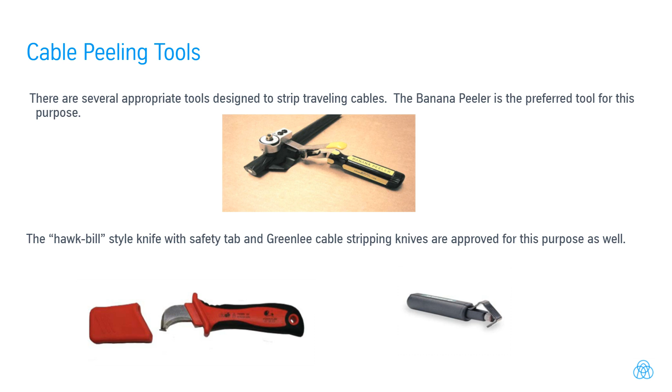Tag the tool "Danger. Do not use." Contact your supervisor for a replacement. There are several appropriate tools designed to strip traveling cables. The banana peeler is the preferred tool for this purpose. The hawkbill style knife with safety tab and Greenlee cable stripping knives are approved for this purpose as well.

5 basic safety rules that can prevent all hazards involved in the use of power tools. Keep all tools in good condition with regular maintenance. Use the right tool for the job. Examine each tool for damage before use. Operate according to the manufacturer's instructions. Provide and use the proper personal protective equipment.

Employees and supervisors have a responsibility to work together to establish safe working procedures. Employees must be trained on how to use all tools needed for the job. Employees shall not use unsafe hand tools. Tools must be used for their intended use only. Remember, if you encounter a hazardous situation, stop. Contact your supervisor or the safety department immediately.

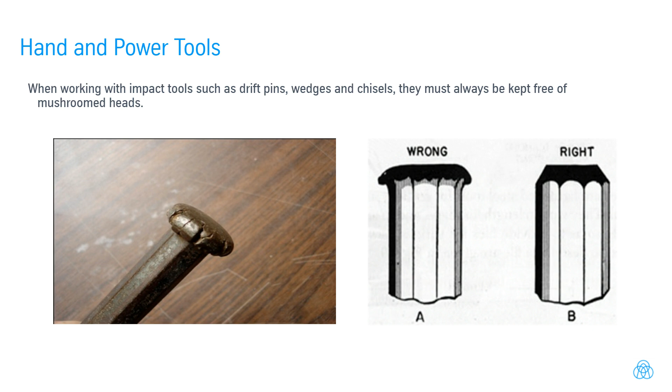Wrenches, to include adjustable, pipe and socket wrenches, shall not be used when the jaws are sprung to the point slippage occurs. When working with impact tools such as drift pins, wedges and chisels, they must always be kept free of mushroomed heads. Wooden handles of tools shall be kept free of splinters or cracks and shall not be taped. All tools must be inspected prior to each use. It is impossible to inspect the tool if there is tape covering it. Do not attempt to repair any hammer.

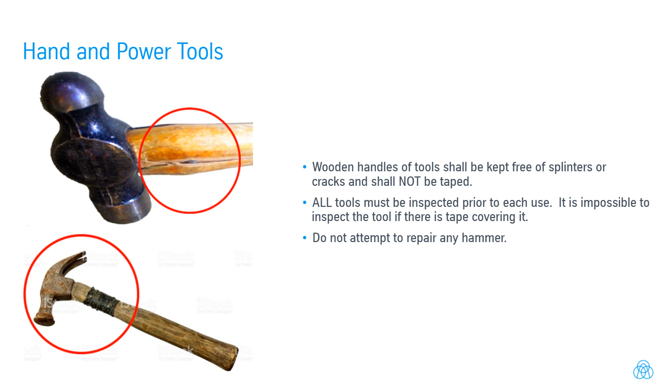Power tools can be hazardous when improperly used. There are several types of power tools based on the power source they use: electric, pneumatic, liquid fuel, hydraulic, powder actuated. Power tool precautions. Here are some general precautions to observe when using power tools. Never carry a tool by the cord or hose. Never yank the cord or hose to disconnect from receptacle. Keep cords and hoses away from heat, oil and sharp edges.

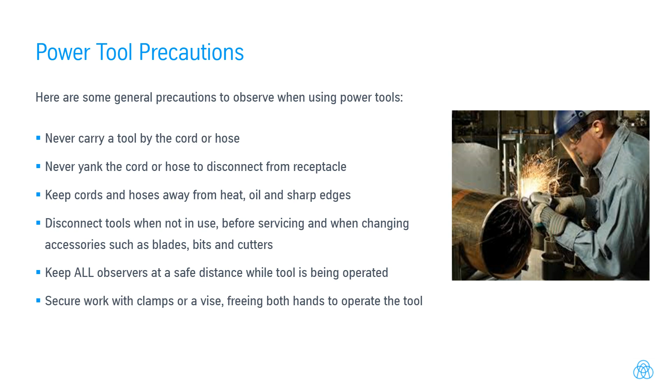Disconnect tools when not in use, before servicing and when changing accessories such as blades, bits and cutters. Keep all observers at a safe distance while tool is being operated. Secure work with clamps or a vise, freeing both hands to operate the tool. Avoid accidental starting. The worker shall not hold a finger on the switch button while carrying a plugged-in tool. Tools shall be maintained, kept sharp and clean. Follow user's manual for lubricating and changing accessories.

Be sure to keep good footing and maintain good balance. Proper apparel shall be worn. Loose clothing, ties or jewelry shall be removed or secured so they do not become caught in moving parts. All damaged tools shall be removed from service and tagged "Danger. Do not use," and dated. See Appendix J. Tools used in special situations shall be tethered or secured to prevent injury, mag drills, etc.

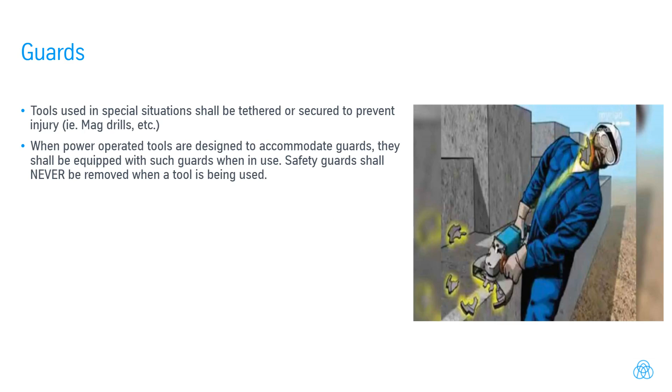When power-operated tools are designed to accommodate guards, they shall be equipped with such guards when in use. Safety guards shall never be removed when a tool is being used. Guards protect the operator from hazards created by point of operation in-running nip points, rotating parts, flying chips and sparks. Portable circular saws with a blade diameter greater than 2 inches shall be equipped with a guard above and below the base plate or shoe.

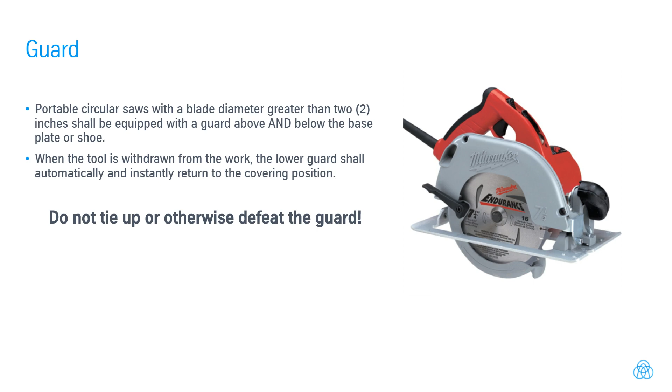When the tool is withdrawn from the work, the lower guard shall automatically and instantly return to the covering position. Do not tie up or otherwise defeat the guard. Hand and power tools, general requirements. All handheld powered circular saws, electric, hydraulic, pneumatic or chainsaws, shall be equipped with a constant pressure switch or control that will shut off the power when the pressure is released.

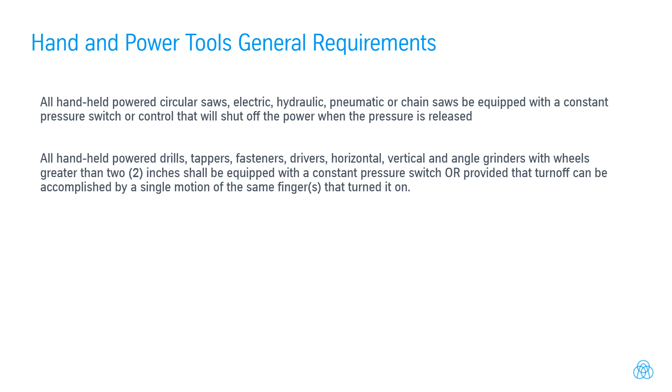All handheld power drills, tappers, fasteners, drivers, horizontal, vertical and angle grinders with wheels greater than 2 inches shall be equipped with a constant pressure switch, or provided that turn-off can be accomplished by a single motion of the same fingers that turned it on.

To protect employees from shock, we have 3 requirements for all electrically powered tools. 1. Have a 3-wire cord with ground and be grounded, or 2. Be double insulated, or 3. Be powered by a low-voltage isolation transformer. The third prong shall never be removed from the plug. All electrical tools without a ground prong shall be a double insulated type tool.

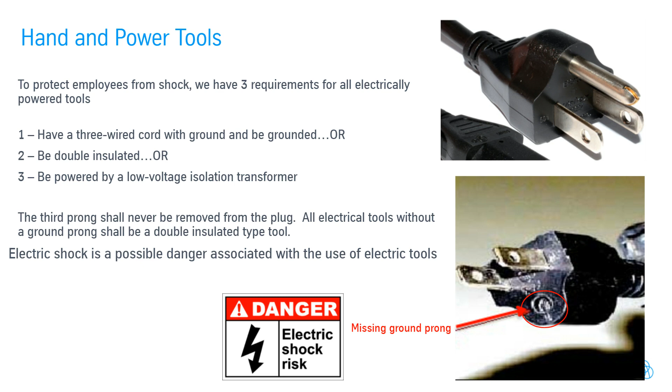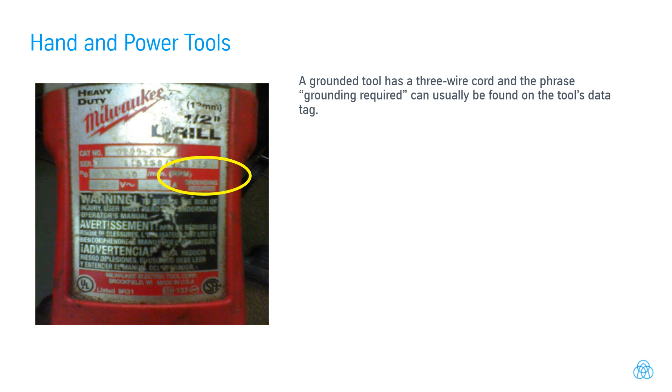Electric shock is a possible danger associated with the use of electric tools. A double insulated tool has a 2-wire cord and will be marked somewhere on the tool, most commonly on the tool's data tag, by the box-in-a-box double insulated insignia. A grounded tool has a 3-wire cord and the phrase grounding required can usually be found on the tool's data tag. TKE employees are not authorized to repair cords of double insulated tools.

All double insulated tools must be repaired by an authorized tool repair facility. Report it to your supervisor and tag equipment danger do not use until repairs are completed. Tools and extension cords with 3-wire cords may be repaired by TKE employees per Appendix Q.

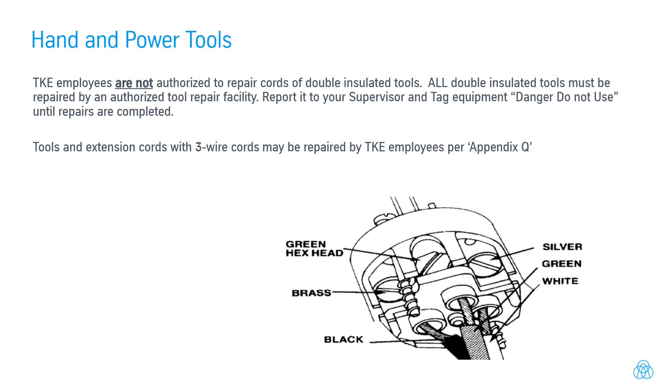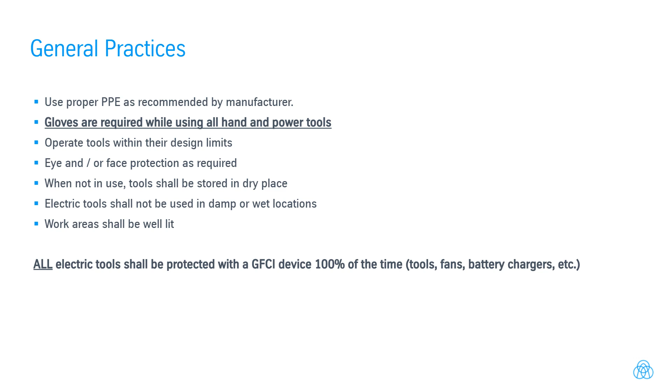General practices. Use proper PPE as recommended by manufacturer. Gloves are required while using all hand and power tools. Operate tools within their design limits. Eye and/or face protection as required. When not in use, tools shall be stored in a dry place. Electric tools shall not be used in damp or wet locations. Work areas shall be well lit. All electric tools shall be protected with a GFCI device 100% of the time: tools, fans, battery chargers, etc.

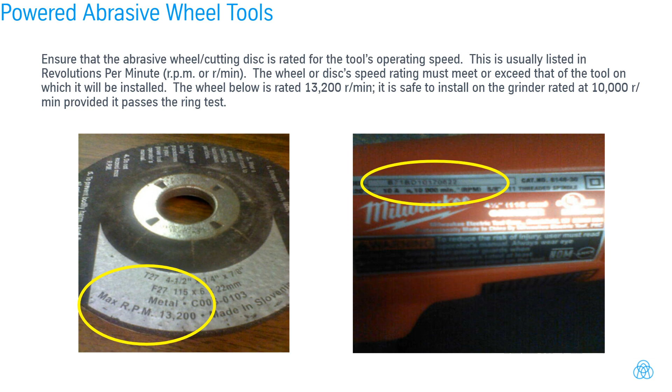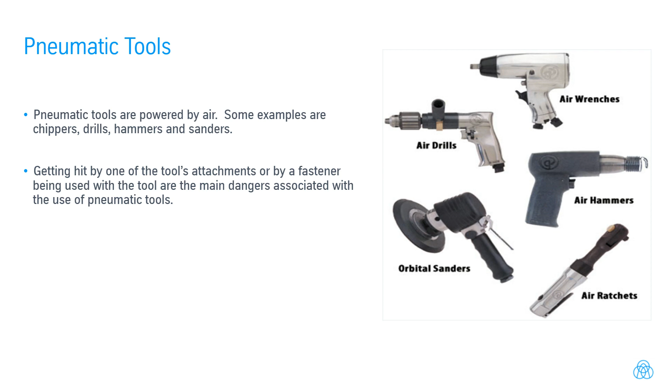Pneumatic tools are powered by air. Some examples are chippers, drills, hammers and sanders. Getting hit by one of the tool's attachments or by a fastener being used with the tool are the main dangers associated with the use of pneumatic tools. Additional safety precautions to be taken when using pneumatic tools include: eye protection is required and face protection recommended. When working with noisy tools, jackhammers, hearing protection is required.

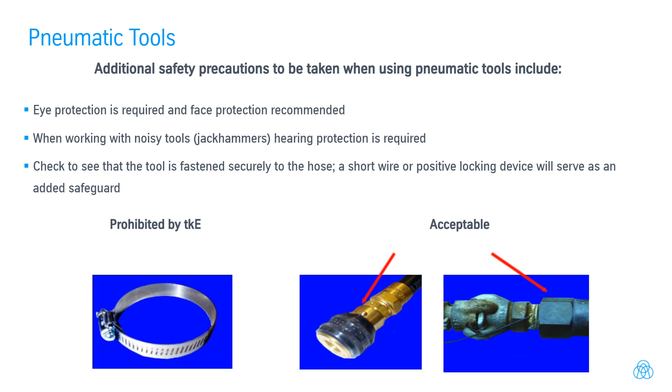Check to see that the tool is fastened securely to the hose. A short wire or positive locking device will serve as an added safeguard. A safety clip or retainer shall be installed to prevent attachments, chisels on chipping hammer, from being unintentionally shot from the barrel. Screens shall be set up to protect from flying fragments around chippers, riveting guns, staplers or air drills.

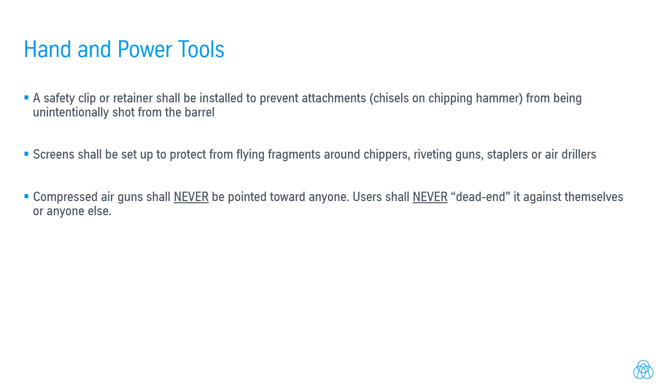Compressed air guns shall never be pointed toward anyone. Users shall never dead-end it against themselves or anyone else. The manufacturer's recommended safe operating pressure for hoses, valves, pipes, filters and other fittings shall not be exceeded. Tools must be used for their intended purpose. Use proper personal protective equipment.

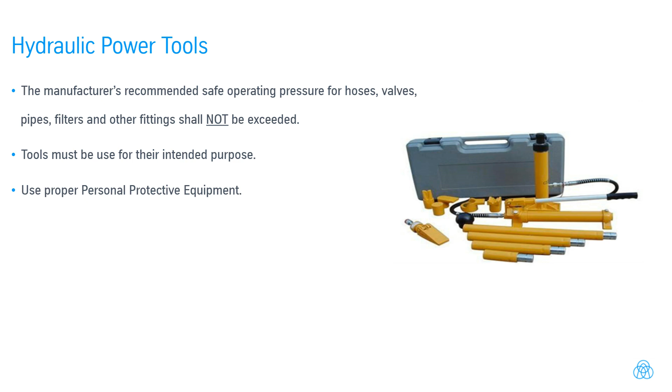Jacks. The rated capacity must be marked on all jacks, and it shall never be exceeded. All jacks, lever and ratchet jacks, screw jacks and hydraulic jacks must have a stopping device to prevent them from jacking up too high. A jack cannot be used to support a lifted load. Once the load has been lifted, it shall immediately be blocked up.

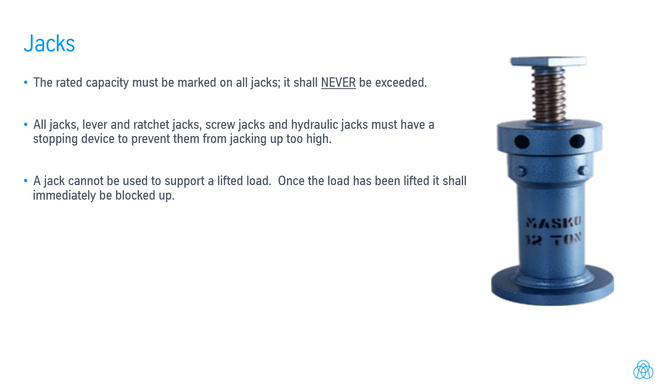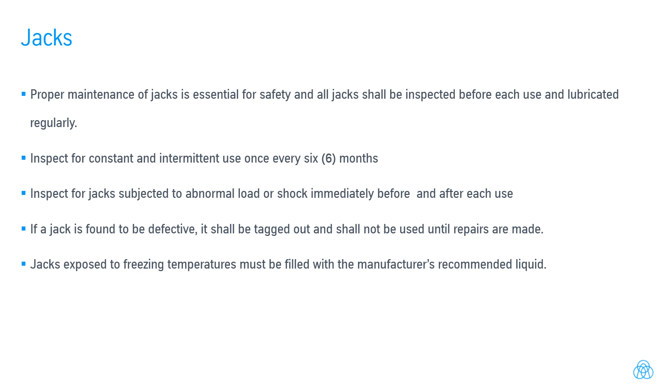Proper maintenance of jacks is essential for safety, and all jacks shall be inspected before each use and lubricated regularly. Inspect for constant and intermittent use once every 6 months. Inspect jacks subjected to abnormal load or shock immediately before and after each use. If a jack is found to be defective, it shall be tagged out and shall not be used until repairs are made. Jacks exposed to freezing temperatures must be filled with the manufacturer's recommended liquid.

Wooden blocking shall be placed under the base of a jack to make it level and secure. 1-inch thick hardwood blocks shall be placed between the metal lift surface and the jack head to reduce the danger of slippage. Remember these 4 points when setting up a jack. The base rests on a firm level surface. The jack is correctly centered. The jack head bears against a level surface. The lift force is applied evenly.

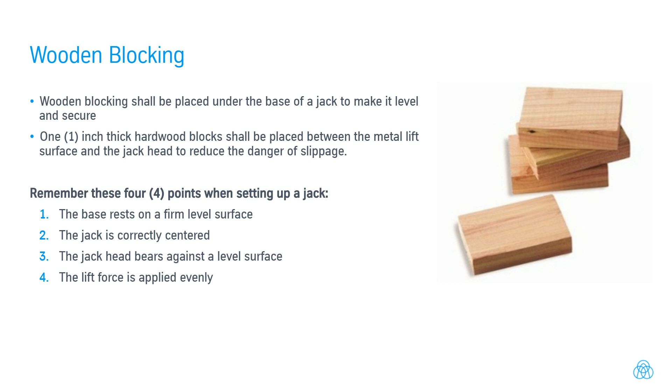Thank you for completing the hand and power tools training.